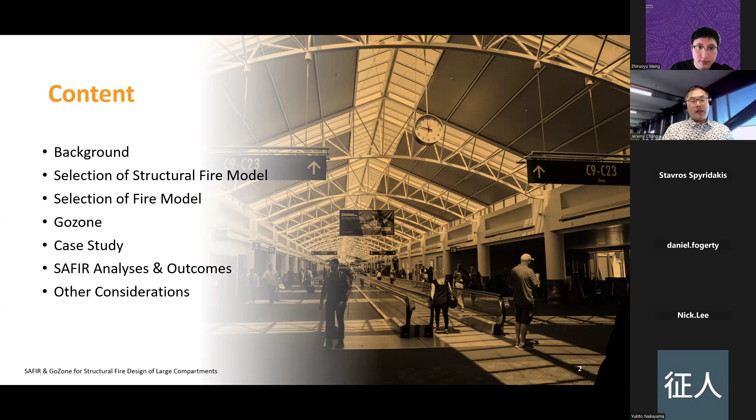I'll talk a little more about GoZone, then we'll discuss the case study, which was the focus of this particular project. I'll show some of the analysis outcomes, then conclude by talking about other considerations.

As a researcher from university, like people doing a PhD or masters, the research topic is basically your focus, and we do want that to be your focus. You probably spend all your time thinking about the particular research topic, being quite academic about it, and then you come out and think about the results coming from the research. So that basically becomes your whole focus, and that's great for researchers.

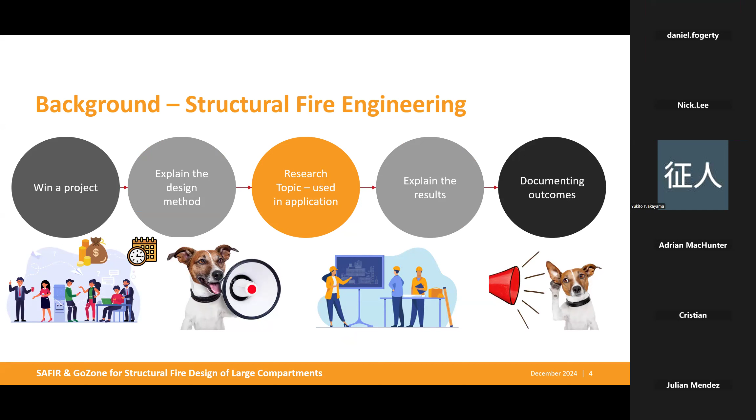Coming into the project side, as a consultant, the starting point is you need to win a project for you to do work - otherwise you don't even have a project to work on. So to win the project, you have to advise your client how you are going to control the project within the time frame and within the budget.

To do that, you also need to go a bit deeper into details, but not too difficult, because you're talking to someone not from your field of expertise. You have to explain the design method to them, with just enough detail for people to believe in you and then let you go ahead and do the project.

And that's when you can use your research topic, put it into application. After that, you have to explain the results, and that will also take time because it needs to bring back to the design method, and people who weren't in your field will ask all sorts of questions.

Even after that, you have to convey the idea - what does the result mean? How do other disciplines incorporate the results into their documentation, into their drawings? So all of a sudden, the research topic becomes a smaller part, and if you didn't really love your research topic, especially if you're writing the thesis at the moment - but later that actually becomes the easiest part to deal with, because at least you know what you're doing.

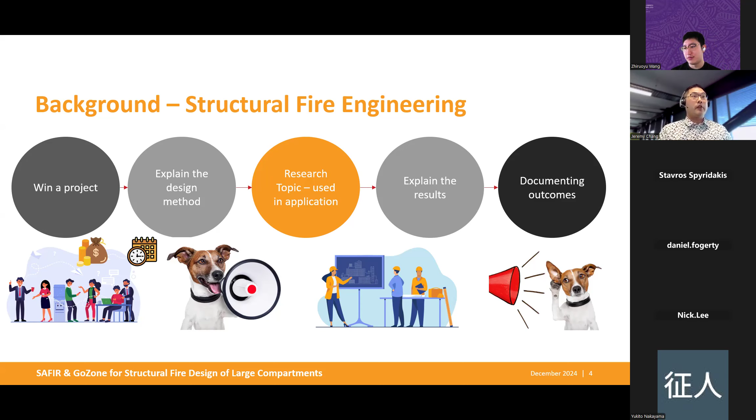This particular project I'm going to talk about is just one example, but it brings us to a project to work on: a large transportation hub. For confidentiality, I'm not going to name the building, but you'll probably be able to guess later on as I go through the slides.

So major transport hubs usually have really large compartments. You don't fill the entire compartment with rubbish. You want a vast open space, and the use of each area will be well defined. It's not like a shopping center where things get moved around easily. The fuel distribution within the building will be well defined too.

When those are the given conditions, performance-based design becomes more appropriate for that kind of building. Otherwise, the conventional design method says all the steel members, if you're a steel structure, need to be fire rated to a prescriptive fire rating. It's the same in New Zealand and Australia. Even without doing more analysis, you can tell that may cause a lot of wastage, and that's not the smartest way to do things. So that's how performance-based structural fire engineering design got brought into this project.

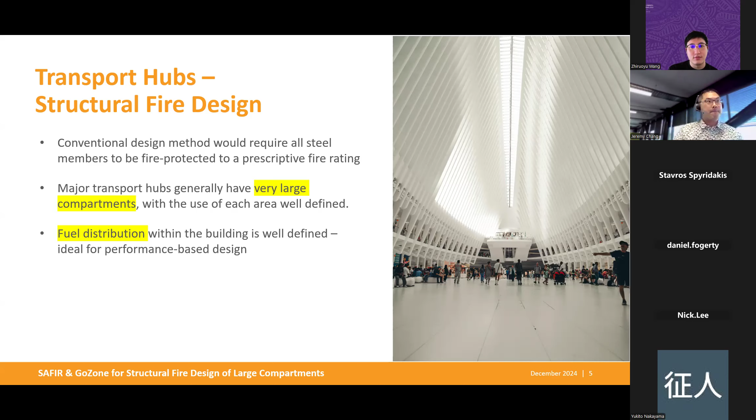Before we go further into running analysis, we have to explain to some parties what performance-based structural fire engineering design is. Some questions you get asked several times, almost every time I'm doing this kind of design, like: what about life safety? What if people are still waiting on the other side, above the floor? And how are you going to maintain the evacuation zone boundaries?

Those are the things - when you're doing structural fire engineering design, we are talking about a different time in the fire development. We are usually talking about the peak of the fully developed phase of a fire. Life safety design, if there's going to be evacuation, that needs to happen in the growth phase, in the incipient phase. You can't say people are going to wait until the fire is fully developed to start evacuating, or even wait on top of a burning floor.

And the performance-based design, in terms of reduction of fire safety systems - are we going to have a reduction of fire safety systems? That's not going to be true. Performance-based structural fire engineering design is not taking away the level of fire safety. We are just, in some way, reporting what may happen in a fire, what the structural performance will be in a fire.

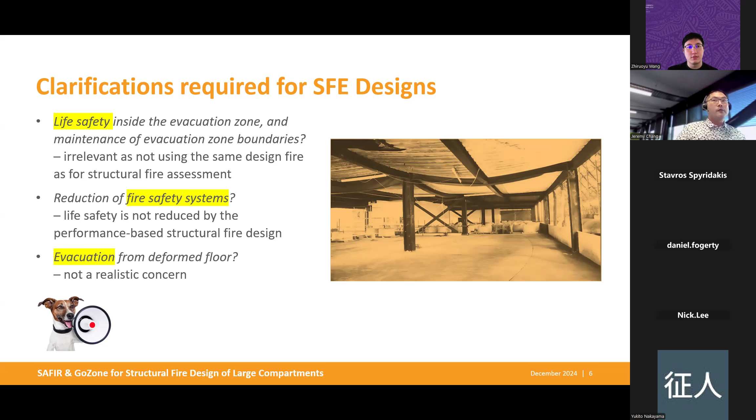Otherwise the project probably will not go ahead further. So once we've done that, then we can start looking into this project. The project is multi-story. The particular one I'm going to look at, the area of interest is on the ground floor. There is going to be a baggage storage hall. Before people travel, sometimes they may have baggage stored in that building, and that's going to be a rack system.

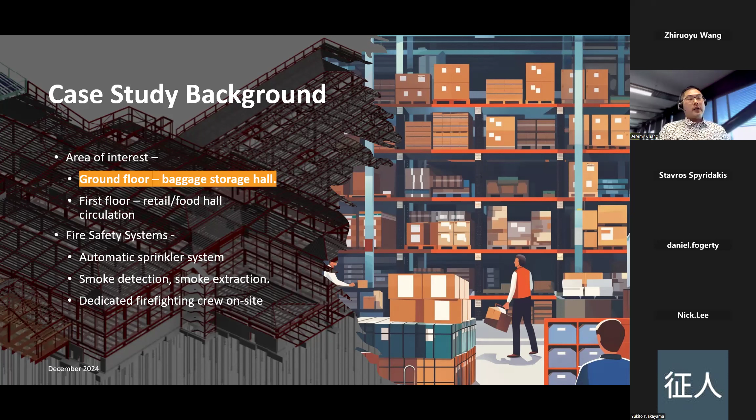The first floor above the baggage storage system is going to be used for retail, food hall, circulation, and probably a lounge area. The fire safety system for a major transportation hub includes automatic sprinkler systems, smoke detection, smoke extraction, and dedicated firefighting crew on site. The sprinkler system has dual water supply.

Even though smoke detection, smoke extraction, and firefighters have almost nothing to do with structural performance, you basically have to paint the entire picture - how can people get out on time - so you won't be bothered by those questions when doing your structural fire design later. Otherwise the same question about how people get out when the floor is deformed will continue to pop out.

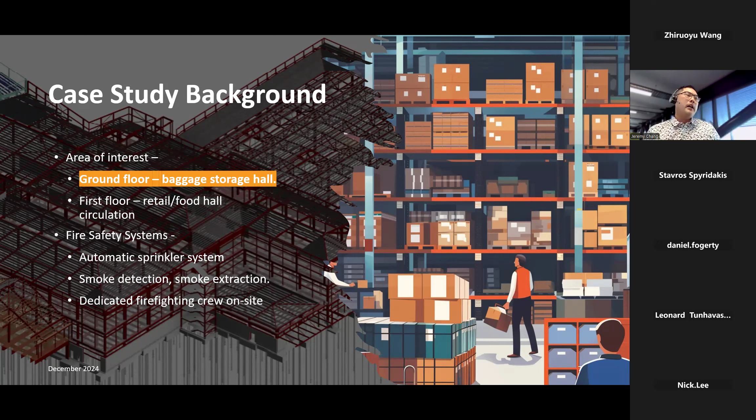The next thing is the selection of the structural fire model. From the commercial sense, as researchers most of you would know there are several models out there - Abaqus, and we are using SAFIR, and there are some other models like Vulcan. All of them, including open source ones, have different uses and different complexity.

For us to choose the structural fire model, we want something simple and reliable, because we don't want to spend a lot of time learning how to use the program and teaching peer reviewers and other parties like local authorities how to use it. If the program is very complicated, and you have to justify all the relationships like the material time, material temperature relationship used in every step, that will not be too attractive to use.

On the other hand, you also need something sophisticated enough. We don't want something too simple like a spreadsheet, or something too crude. We want something that can include the decay phase and cooling phase, rather than just looking at the ISO fire. We definitely want something that can look into localized fire and fire spread, and we also need to be able to cater for different materials.

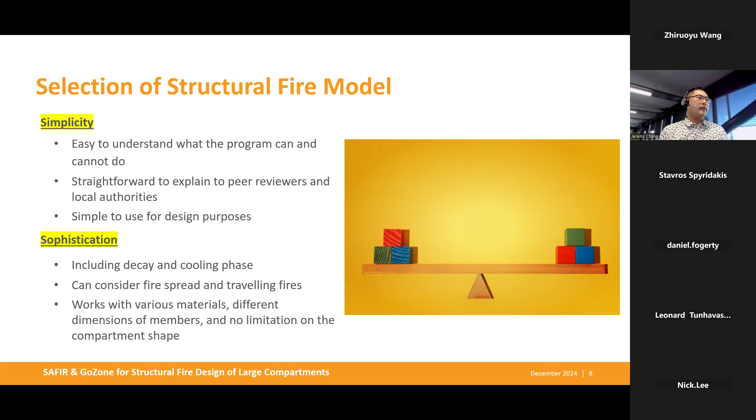For this project it's easier because we only have steel and concrete to think about. But even with steel there are different types, and with concrete you can deal with different kinds of aggregates. Those are the things that can influence the material temperature relationship, and you want the program to be able to handle those differences.

For people who didn't know about SAFIR, that is the program we used to teach at University of Canterbury, and it is still being taught at several universities. It was developed specifically for structural fire analysis. It's a bit different from Abaqus, because Abaqus you can use for anything, while the intent of SAFIR was structural fire analysis. It was developed at the University of Liège by Jean-Marc Franssen, and now Thomas Gernay at Johns Hopkins University is continuing the development of this program.

The good thing about this program is - we know it's finite element analysis - and the good thing is it's not open source. You have the thermomechanical relationships controlled by the author of the program. The downside of not being open source, as a research tool, is you have this extra step of feedback to the developer saying there's something you want them to fix or some new relationship you want them to add. So it's not as easy to change as, say, Abaqus or OpenSees.

But if it's not that easy to manipulate the code or change the code, it's easier to convince the peer reviewer or the local authorities to accept this, saying since it's almost impossible for us to manipulate anything, the reference paper would still be valid, like all the other validation before would still be valid for this project.

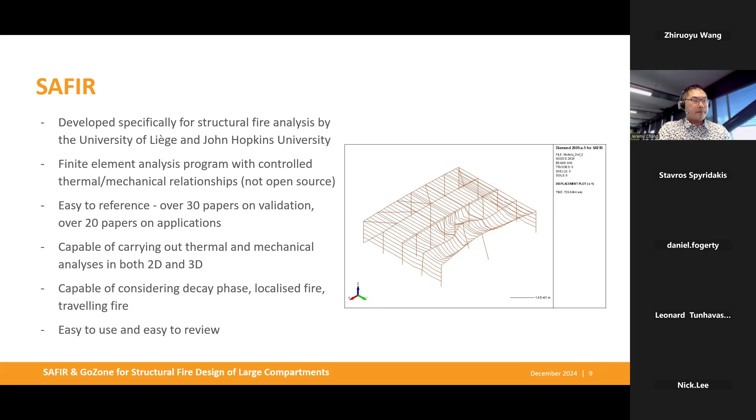The next thing is to do with the fire model, because using parametric fire is not really the smartest way to deal with a large compartment. You don't really need to be specialized in fire dynamics to appreciate that the fire in this kind of large compartment is more likely to travel around rather than having the entire compartment exposed to a uniform temperature. So how do we deal with this traveling situation, while having the fire growing and also the decay phase?

You can use FDS. Everyone knows FDS here, so not going to talk too much about this. All of us also know that if you want to run something sophisticated, and also for a large compartment, FDS is going to take quite a bit of computational time.

There's another program we can use called TRAFIR for SAFIR. I'm going to talk a little bit more in the next slide, but it was developed based on the TRAFIR project, and the focus of that project was on fire spread. The good thing about TRAFIR for SAFIR is it is easy to use, and it was developed for structural fire analysis, so it doesn't give you other information. For example, it's not going to spend time calculating the species yield, that kind of thing, because FDS will actually give you all that information, and for structural fire analysis, I don't really need that information.

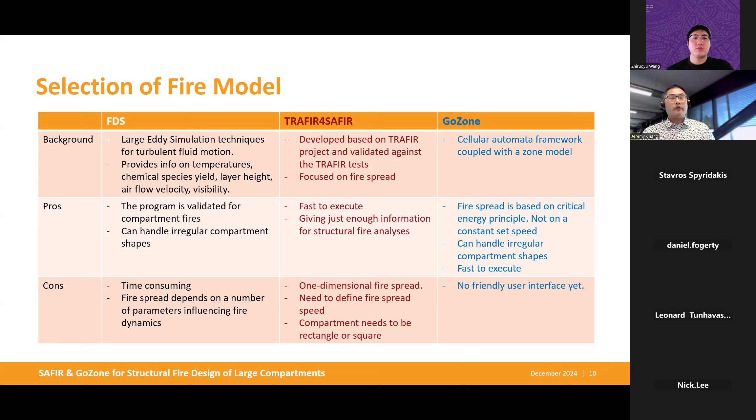GoZone also was developed for structural fire analysis, so it will only give you the information you need for doing the structural fire design, the temperature at different locations, for example, and it is fast to run compared to FDS. The downside of GoZone compared to TRAFIR for SAFIR is the user interface is not there because it's very new, and there's no preprocessor yet, so you do have to write the code to fit into the fire program.

The reason I'm talking about all of this is the project basically happened at the right time to coincide with when the research was being carried out. So GoZone is almost like the last step of this TRAFIR program, which is a big research program in Europe about traveling fire. This program started definitely before 2020 - 2020 was when the final report came out, so 3 or 4 years before that. It started from this program on traveling fire of large compartments. They did some small scale testing, large scale testing, and a numerical model was developed based on the testing results.

It also came up with some simpler calculation method, so you can actually get a spreadsheet from this TRAFIR result to find out the heat flux on structural members. And TRAFIR, as I mentioned before, is suitable for rectangular spaces with evenly distributed fuel load. The downside of the simple zone model is you still need to have some sense about whether you are having a traveling fire or just a simple fire spread.

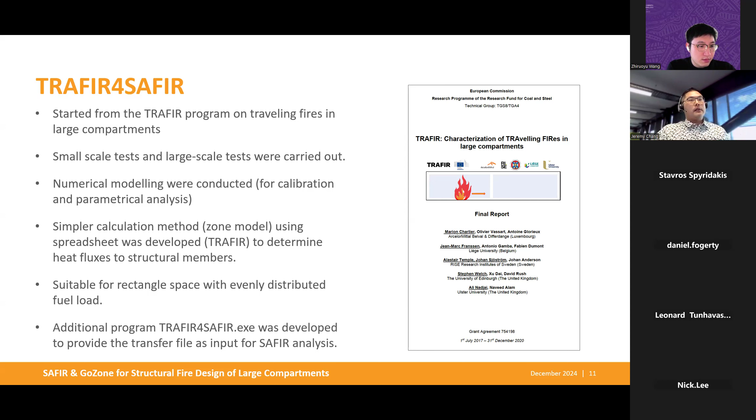And that was done in 2020. Then after that, Dr. Antonio Gamba - this was his PhD research - developed GoZone, and it was published, basically finalized, in 2021. So that was the time when we start doing the structural fire analysis.

So the timing is actually quite important here, because a lot of the time, for researchers, you come up with some brilliant idea, you develop a calculation method, and probably you even build a program for something you came up with, and that can wait a long time before someone adopts that into a project. This time, I think all of us were being lucky that the timing of this project coincided with his publication, and in some ways it's also helping him, since someone is using his research outcome. So it's quite a rare situation.

For example, with SAFIR, it took ages for the industry to catch up and say, well, this program actually can be used in the commercial sense.

You can find out more detail from that published paper. You definitely can find out more detail from his thesis. And now University of Liège is going to release this program to the general public. They are still preparing the website, but you can tell what the website will look like by going to that link.

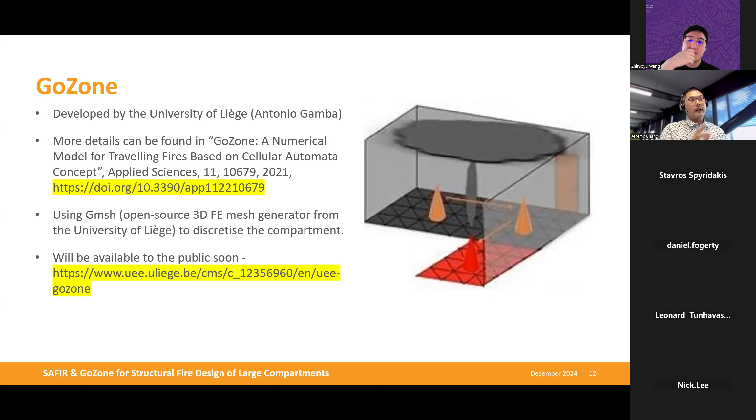So I'll repeat this again - the compartment, it's not just the size, but the compartment can be irregular and can be of different shapes. You can even have different fuel load distribution, for example, where my mouse is. You can have, say, half the floor having lower fuel load, somewhere else having a bit higher fuel load, and somewhere else with really high fuel load. So you can play with the load distribution, and it doesn't even have to look like such a nice shape - you can say you have some rows of storage, and you want to be very precise about where those storage areas will be.

And it can consider compartment boundary conditions, for example the wall condition - the density, conductivity, specific heat, emissivity, convective coefficient coming from the wall and ceiling, it can give you that. And it can also consider window breakage, so you can say those are the windows around the compartment, and you want them to break at a certain time to introduce more oxygen into the calculation.

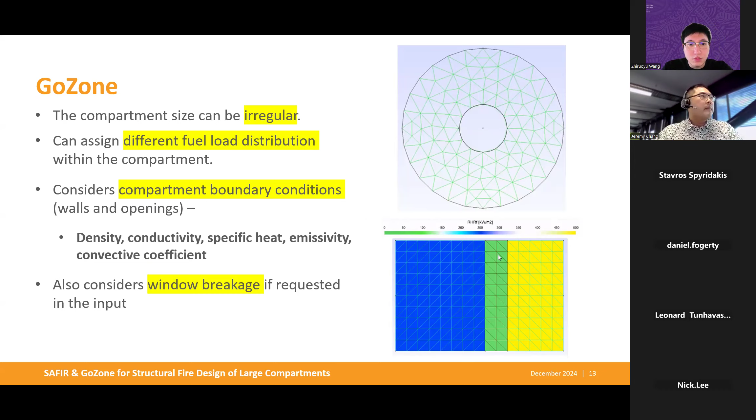Each fuel cell - so the terminology being used here is fuel cell, but it's basically just some tall cylindrical tubes - is defined by the growth rate, the heat release rate per unit area, fuel load, and you also need to define the height of the base of the fuel above the floor area. Those are the things you would also use in FDS, and you put that into the program here.

The calculation considers fire spreading through the heat flux, the cumulative heat flux, and critical energy. When the received heat flux reaches the critical energy, it's going to ignite, and the fire is going to spread to the next cell.

And so that's the radiation. It depends on the radiation from the smoke layer and also from the flame, from the fire. The heat flux comes from both the smoke layer and the fire, and then it's going to decide whether the fire is going to spread.

It's also thinking the flame is not going to be transparent, so the flame is going to stop the radiation coming from elsewhere from going past the flame and affecting the neighboring cells. It's quite sophisticated in that way.

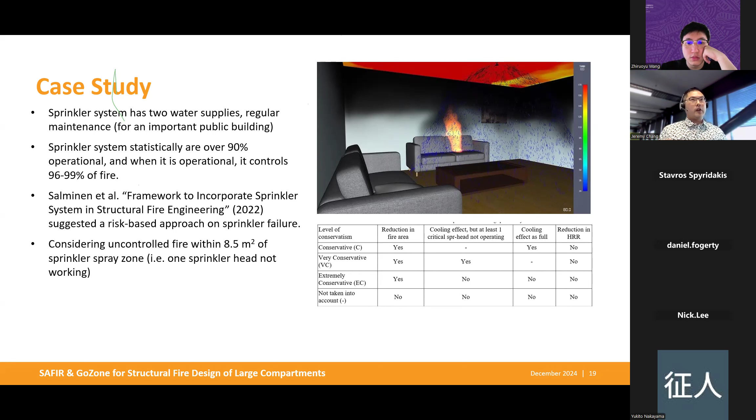So we're saying, let's assume we're that unlucky, and the sprinkler head right above the flame is not working. In that case, your fire will spread - you basically have uncontrolled fire for the entire 8.5 square meters, and the rest of the area may have a bit of control from the sprinkler system.

Going back to the project description, it's 6.4 meters of storage of luggage. In New Zealand, the verification method asks for 800 megajoules per square meter per meter of storage height. So we're talking about 5,120 megajoules per square meter - that's the fuel load at the center of where the fire is going to be.

Outside of that area, we are looking into the fuel load being much lower, because we are reducing the fuel load to represent the case where the sprinkler is actually controlling the fire. So we're not saying the fire will only grow inside this 8.5 square meters - it's going to grow more severely inside that area, but outside the fire size is supposed to be a bit smaller.

And the heat release rate per unit area - that's something we also did some research on and found a decent number for rack storage. The growth rate of 150 seconds is similar to a fast fire.

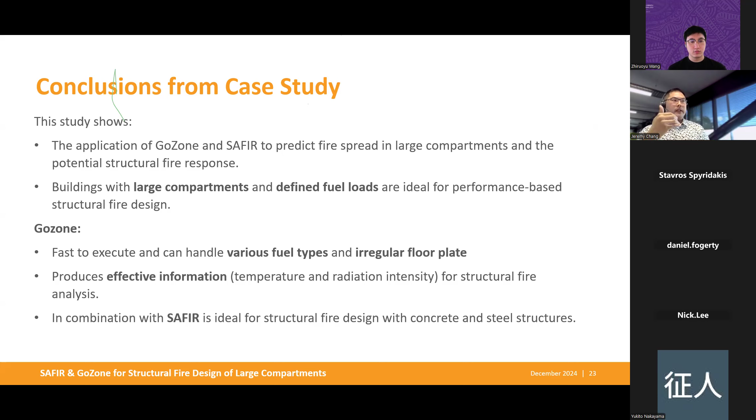GoZone is not, so far I don't believe, suitable for timber design because it is a zone model. It cannot really handle having both fire coming from the floor level and also from the ceiling level. So exposed timber probably is not a good idea for using GoZone.

So just to recap the idea, what I presented here was the design method using the research coming from Antonio Gamba and also all the other research before that, SAFIR, into this project, and then having to explain the result to the peer reviewer and to the local authority.

I didn't cover the fun part, which was how to win a project. That was a lengthy discussion and involved several other people. Also, how to, now the design is done, incorporate all the outcome into other people's documentation, for example the architectural specification, and then the final architectural details on where you should use intumescent paint compared to other fire protection systems. That is ongoing and almost finished, but still ongoing.

So the overall project is a lengthy process, and the research topic I'm presenting here, which appears to be most interesting to researchers, becomes a smaller part of the overall project in terms of the timeline.

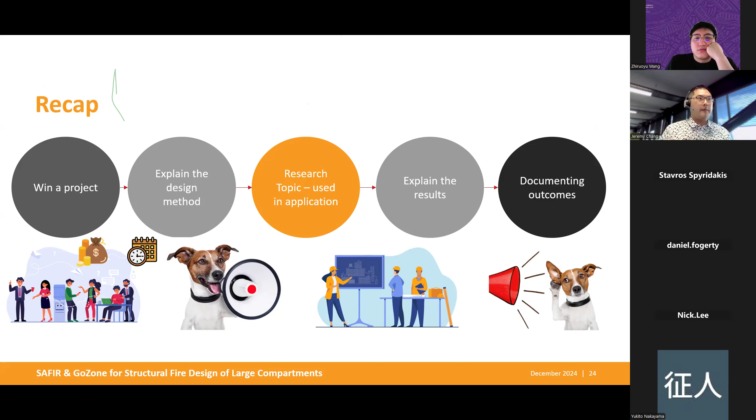And just a final remark. When you are presenting this idea of performance-based structure fire engineering design, you have to be very clear about what we are doing. We are not here to do wonders. We are not here to say the structure is not going to deform, or that we can take away all the intumescent paint or all the fire protections. People need to be realistic about what the building will achieve, or what this structure fire analysis will achieve after engaging us.

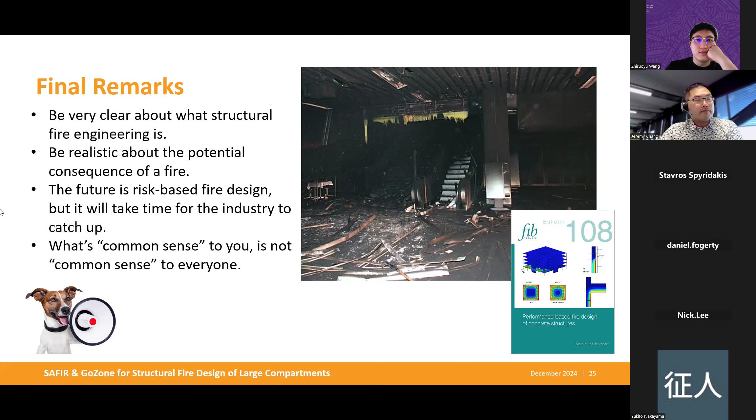I had one question - was it GoZone? My question was basically about the heating condition that comes out of the model. Is that only a horizontal representation or plan view representation of the heating conditions, or is there also an element of vertical variation? For instance, if we've got a reasonably sized compartment, does GoZone discern the difference between a fire condition at say 0.5 meters above floor level versus 0.5 meters from the ceiling level?

So you will - let me try explaining what's going on here, and if that's not what you were asking, just repeat the question. Sorry, no stress.

It is going to give you the radiation intensity in 3D, which means it does calculate the temperature or radiation heat flux at different heights, different spaces. This is the way to consider that it's going to be in 3D space, and then talking about the observation domain - if you don't set a domain and say you want the intensity from different spaces, basically it's going to discretize your entire space into several points, and then give you the radiation intensity at different points.

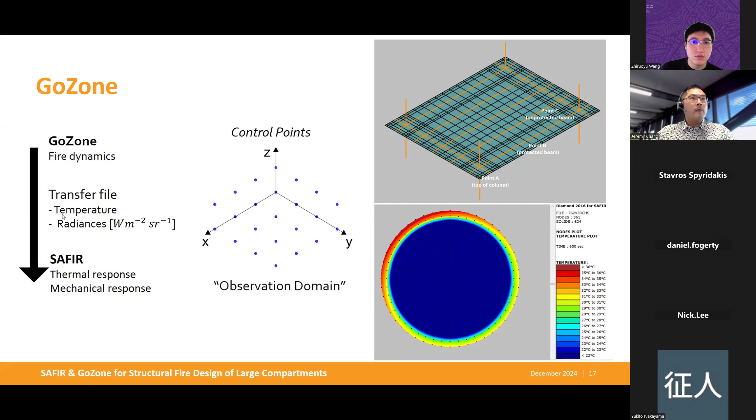Okay, yeah, because I may have missed something in the presentation, but I was just looking - a lot of the files that you showed in the slides were from what I took to be a plan view. So do you have a representation of one of those 3D views?

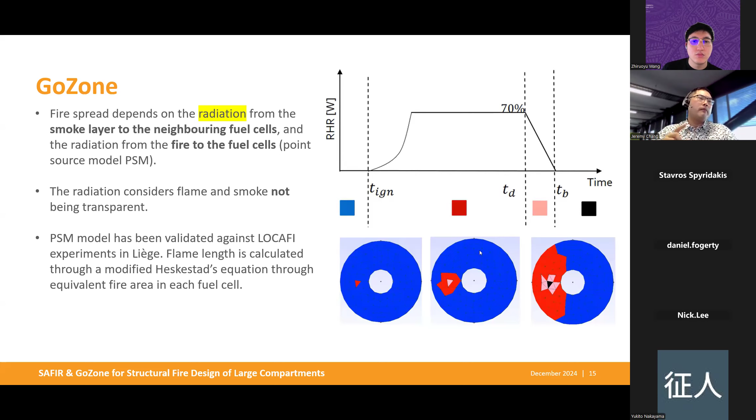I don't have those loaded here. Oh, that's fine - and also because those files were more to do with the fuel cell, like how the fire is going to spread. So this fuel cell is basically a cylindrical tube. This one has the fire ignited here, and the other spaces - those tubes - have no fire yet, and then the fire is going to spread like that, and each one of them is a zone model.

So you do the balance within each tube. And so when you set up that model in GoZone, as you mentioned before, do you essentially plug in your thermocouples in the required locations around your structural elements, and does it give you like an Excel output file, or how does that function work?

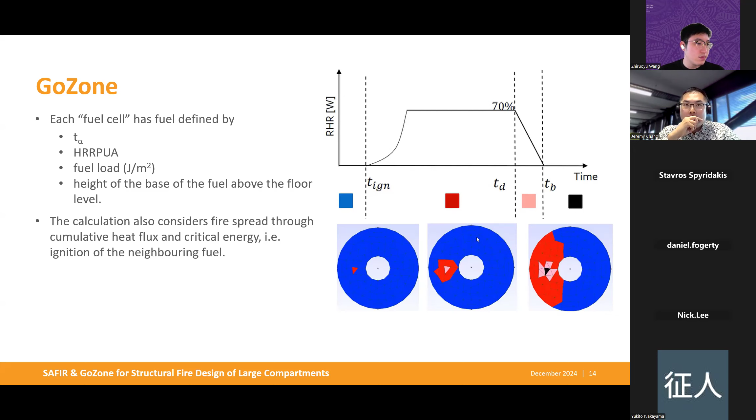That's a good question. Let me find the file. So for GoZone, because it's pretty fast to run, the whole simulation takes about 2 minutes, and I can build quite a large compartment. So that's basically the entire compartment with all the beams - horizontal beams and columns everywhere.

So that's the large compartment we put in, and then we told the program to discretize the space, and later we said the most interesting part is actually at the center here, like how it's being heated up, how it's cooling.

So I asked the program to give me the outcome from just that small space, a bay of structure - that's the structure bay. So I set the observation domain into a small space, and that space corresponds to a structure bay.

And then you just bring that across to Safir, and that exactly represents it. So if my observation domain is somewhere really far away from the interesting area, that may give me some useless result when run in Safir, and it's going to give me basically no heating. So you can move the observation domain around, but of course we want the most interesting part.

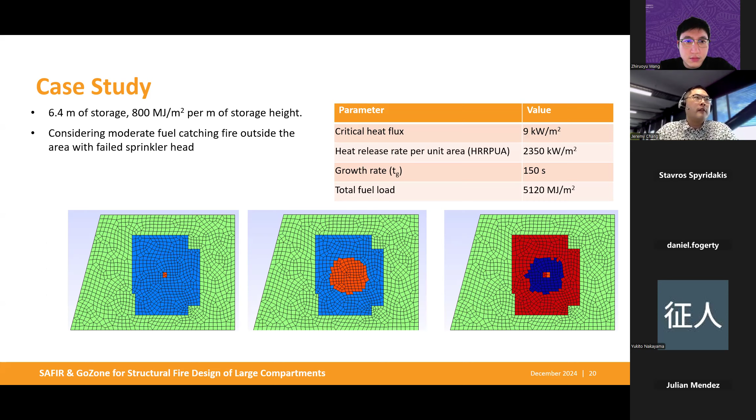So our temperature was around, well, I forgot exactly, but the model was thinking about 900 degrees, which has something to do with the flame temperature. This was more due to having a lot of ventilation, which also vents out the air. If there's not enough ventilation, more heat builds up and the temperature will be higher. So that's actually the downside of assuming so much ventilation.

The temperature got limited because it basically becomes more like a free burn situation. Yeah, it burns, but the temperature is actually lower than you'd expect to see. I agree with that. If I were to assume, say, two or three sprinkler heads fail, and not just an 8.5 square meter area, then the overall fire will be bigger and more likely to become ventilation controlled, and the feedback coming from the boundary will influence the temperature a bit more.

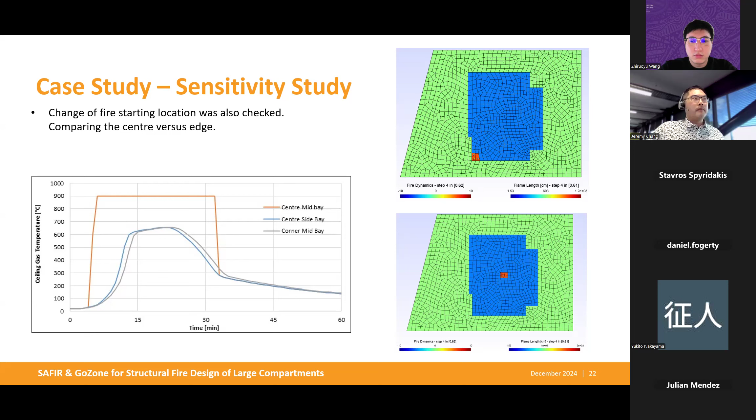I was going to say, in the model you consider individual bays, right? You don't consider a global model - it's like a local bay, and if the local bay is fine... I guess you're looking at the geometry of the building, which one is the weakest point.

So did you take all the bays as that? Yeah, because each bay - not sure whether I had that information here - but each bay is around 10 meters, more than 10 meters. And the sprinkler failure zone will be just within each bay. Okay, so it was kind of identical, like that. Yeah, exactly.

I'm just wondering how this would apply to storage areas - how would it work when you compare this to doing fire loading plus... what we usually do is the comparison between mechanical properties reduction and fire loading case, and then you compare the two.

So fire loading design, point four reduction factor versus the strain you talked about earlier. Well, so the loading scenario, I suppose you're talking about the load combination - yes, the point four combination, correct.

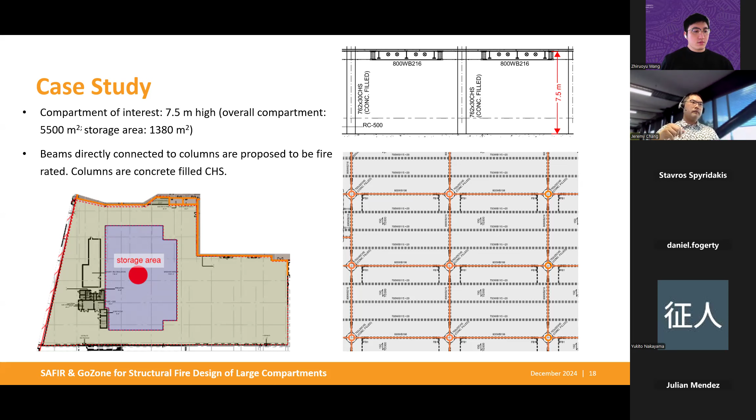I thought it was - I think you mentioned that. No, maybe I missed it. Your situation is probably more like a multi-story warehouse, which is another problem to deal with. I see what you mean.

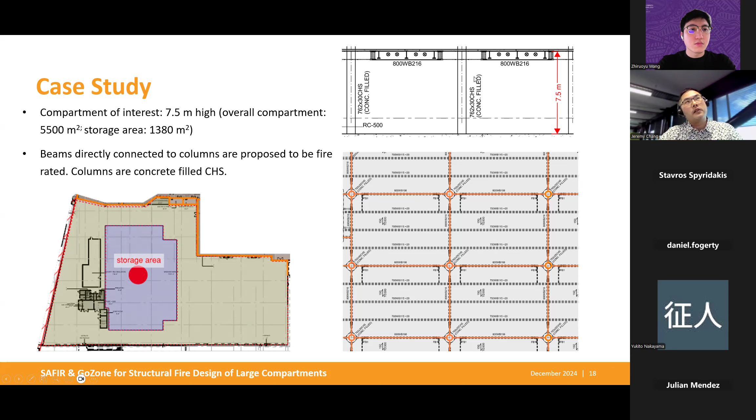And that was applicable to beams on the ground floor and ceiling level, basically the whole area that you've highlighted there - beams, columns, and then the beams above. Right, so that's what was trying to model.

Okay, awesome, awesome, thank you. All good. Thanks. Any last minute questions from the audience?